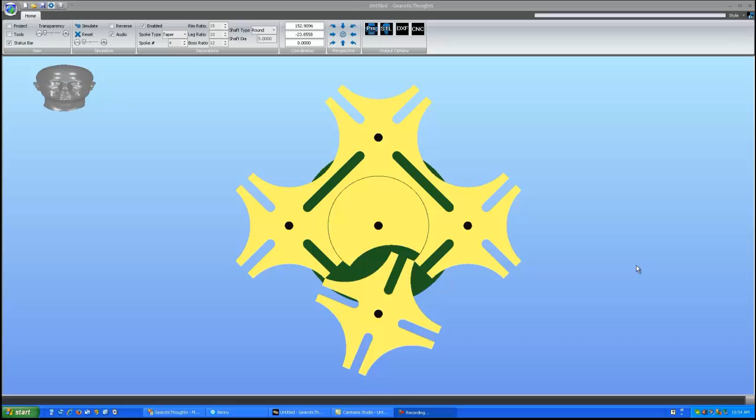Hello everyone, and welcome to the tutorial on using Geneva gears. Well, we finally hit the stage where the videos are going to get shorter and faster.

Alright, these are the new Geneva gears. In order to use them, simply select the ratchets page on the toolbar, and here we have our Geneva gears. Now there's very few selections for Geneva. There is a selection here for pin ratchets, and they're not available yet. The only thing so far released on ratchets is the Geneva gears.

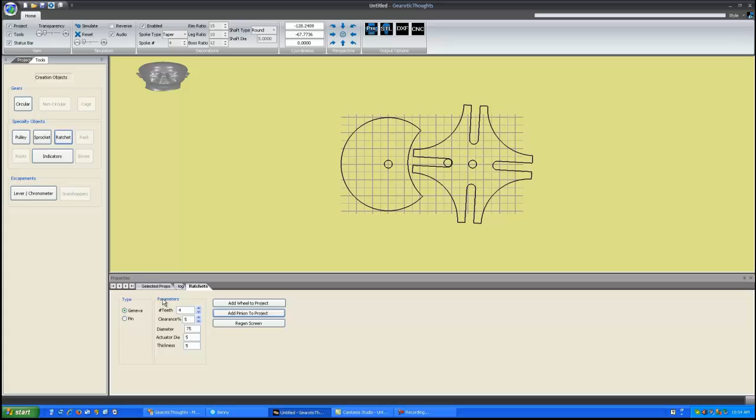You can select any number of teeth. And something to take note of here is, again, we're not dealing with module because these are kinetic devices that people want to play with because they look good. So because of that, I've set them to a user-defined diameter. The diameter that you're setting is of the wheel, which in the case of a Geneva is the driver.

As always in Gearotic, the item on the left-hand side on a design screen we will consider the wheel. You can set this wheel to any size that you like, and just keep in mind that the Maltese cross beside it will vary its size based on the number of teeth multiplied by the diameter of the driver.

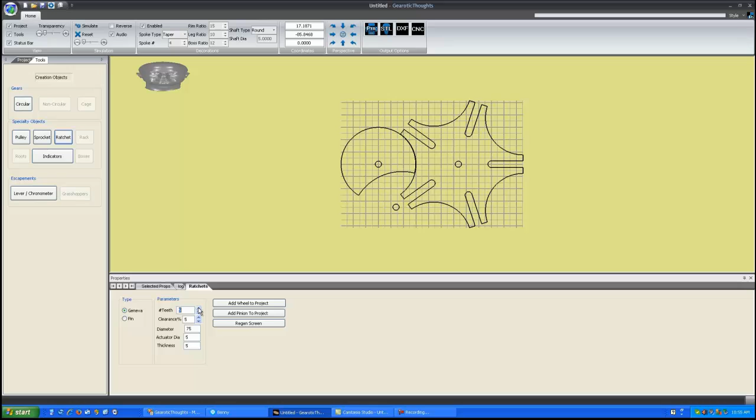So again, you can have any number of teeth that you like. Things may look a bit strange until you hit simulate because things are out of sync. If you hit reset, you'll go back to a 0-degree design angle. There is a clearance selection here.

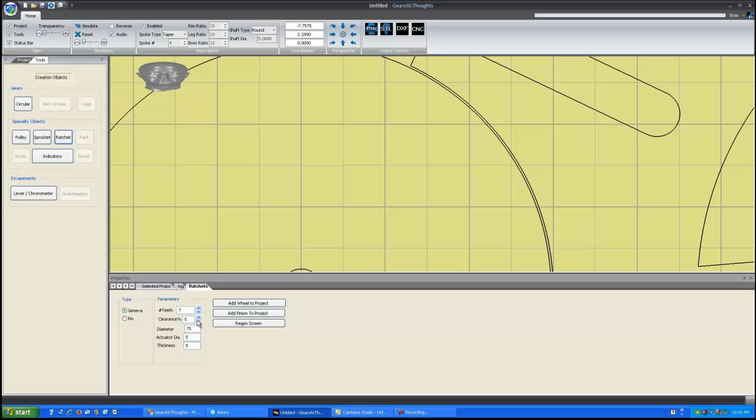Whenever you build a Geneva, you don't want this wheel to be always touching the Maltese cross. In essence, it usually will, unless the cross has some sort of detent on it. But you want to have a clearance here, so the clearance percentage allows you to select this clearance distance. It is a percentage of the size of the pin. It's a rather arbitrary measurement, so I just chose the pin and said that's what you will use as your clearance target.

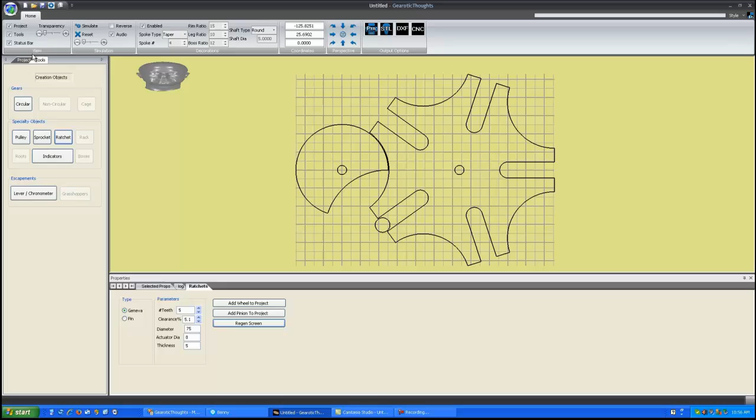So in addition to setting the diameter of the driver, you can set the diameter of the pin as well, of course. There's a regen button so that you can regen for that condition, and a thickness of the pallet. Now once you generate these things, they will appear on the project screen with a disc just under the driver. The disc will be 1/2 of the thickness that you have specified for the entire device.

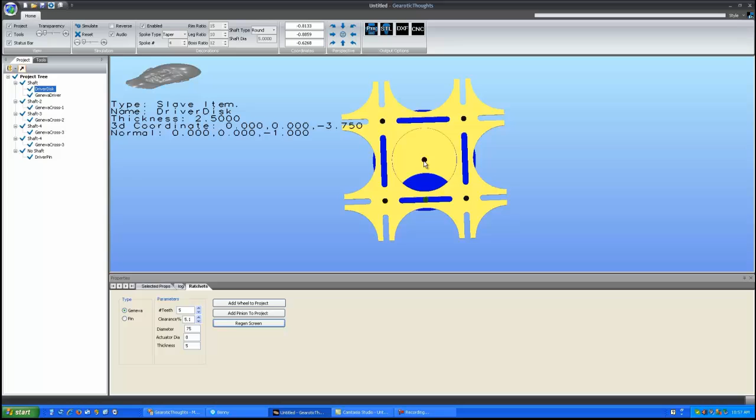Genevas are typically made up of one component on the pinions, which are these Maltese crosses, and 3 components on the driver. You have a driver, which is this round shape in the middle with a scallop out of it that sits on a disc, and on that disc you put a pin. Those 3 components are considered separate components inside Gearotic Thoughts.

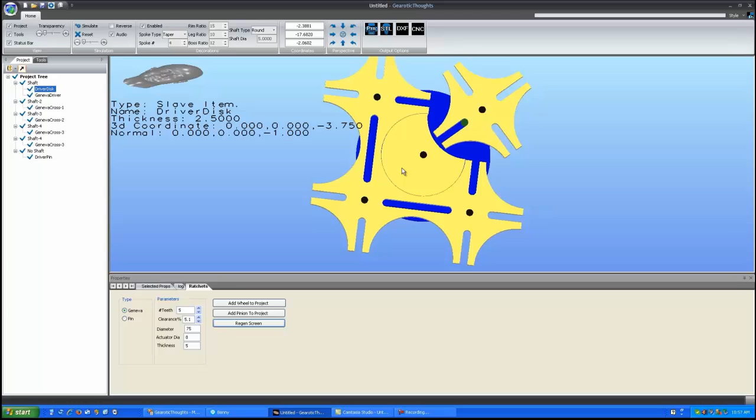And when you go to machine them, since Gearotic does not as yet, although it will at some point in the future, do pocketing, all it can do for you is it will cut the driver, it will cut the disc with a hole in it for the pin, and it'd be ridiculous to cut the pin, although you could do that as well. Basically, it's meant to cut the disc, bond it to the driving disc, and stick a brass pin or whatever in it to get your motion. And that's about all you really need to know about Genevas.

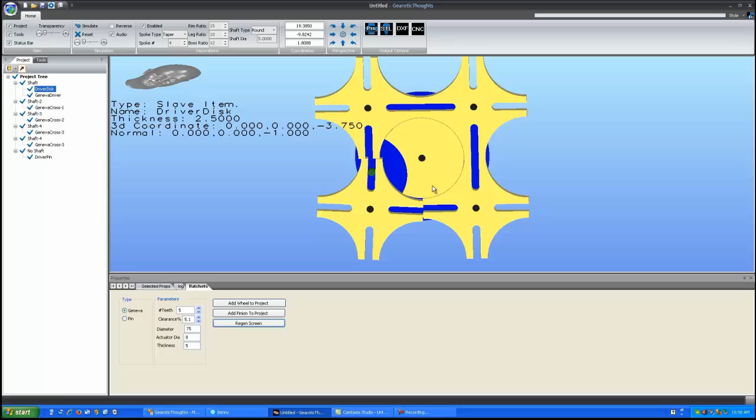A few things were added to the program during the development of Genevas. When you go to place a Geneva, because it's built up of several components, if you point at the disc to select, you'll notice the system says master object of slave reselected. That means that you have selected the disc during a placement operation, but the system knows that you really need to select the driver if you wish to place a Maltese cross on it. So it'll do that automatically for you.

Also, from this point forward, you can right-click on any gear in the project tree to delete it. The delete object is now there, and as of the next version, hitting the delete key on your keyboard will delete an object. Although I don't want to complete that until I give you an undo function, and that will be showing up soon as well.

So that's it. That's all you really need to know.